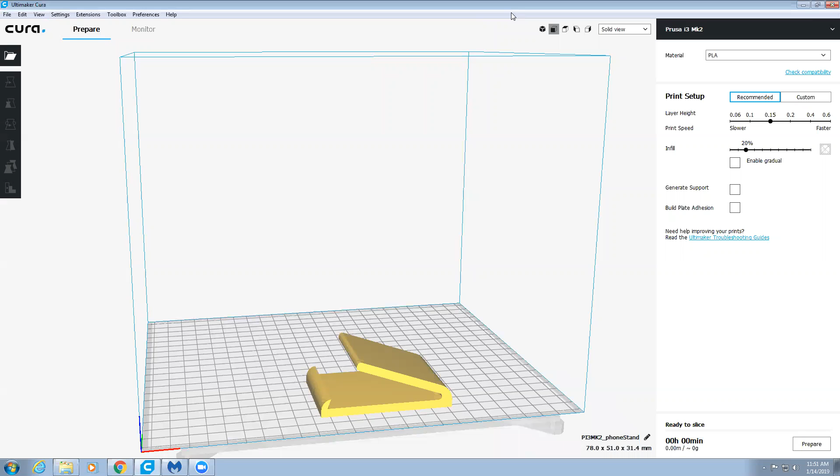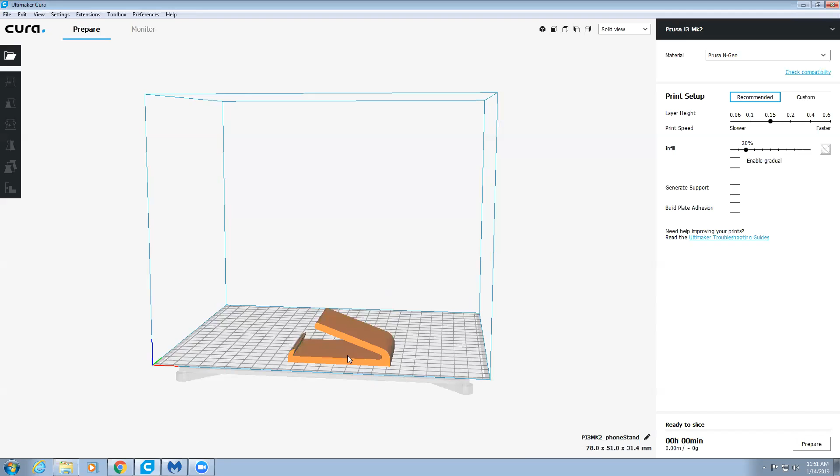After you've selected that, you'll notice the build plate changed to match the size of the Prusa. Now we need to make sure we're using the correct material that's currently loaded in the printer. Currently we have Prusa's own N-Gen filament loaded, not PLA, so we're going to go to Custom, Custom Material, N-Gen, Prusa N-Gen. Now we have the correct material selected.

Next, we're going to go to the print settings and go to layer height. Layer height is like the resolution of the print you're making. 0.06 is a very fine, smooth surface, but it takes a lot of time to print, almost an entire day for large prints. Whereas 0.6 is much faster, printing within an hour or a half hour, but it's going to be very rough and bumpy, and honestly it might not even print well. I like using 0.15 because it's right in the middle. It takes an hour, maybe 2 or 3 hours to print, but it comes out pretty smooth and nice.

Next is infill. Infill is the amount of material we're putting inside our part. You can do 0% infill, where it's just a shell, or you can do 50 or 100. Notice this box changes to represent how much material we're putting inside our part. You really don't need a lot of material to make a strong part because it's in a checkered box grid, so we're using 20%.

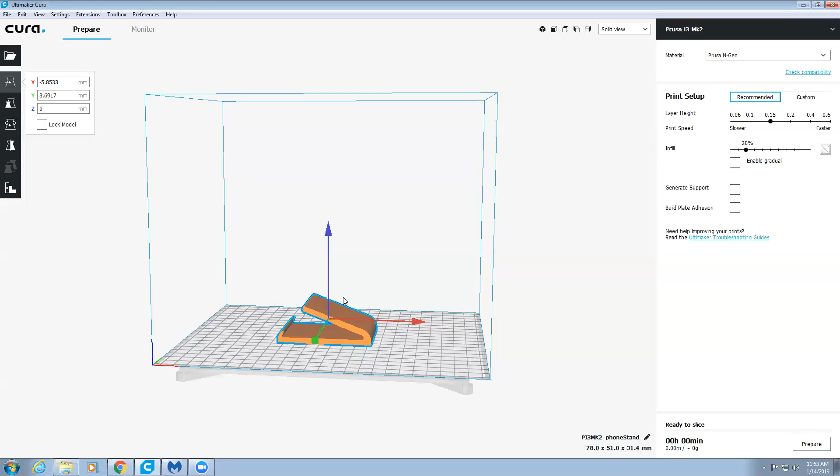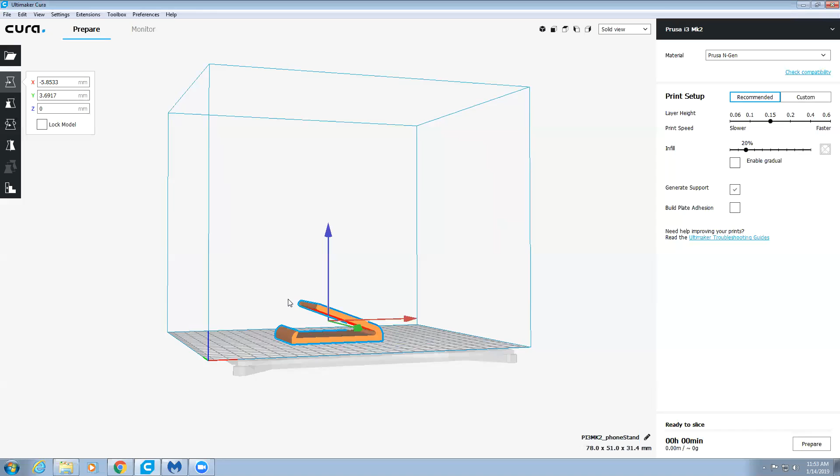Next, you'll go to Generate Supports. Because our material has an overhang, we can do one of two things. We can either select Generate Supports, which will fill this area with removable material you remove after printing to help print the overhanging section. Or, with the material selected, we can come over to the left side, and in this menu we have options to reorient our part to maybe print better and faster.

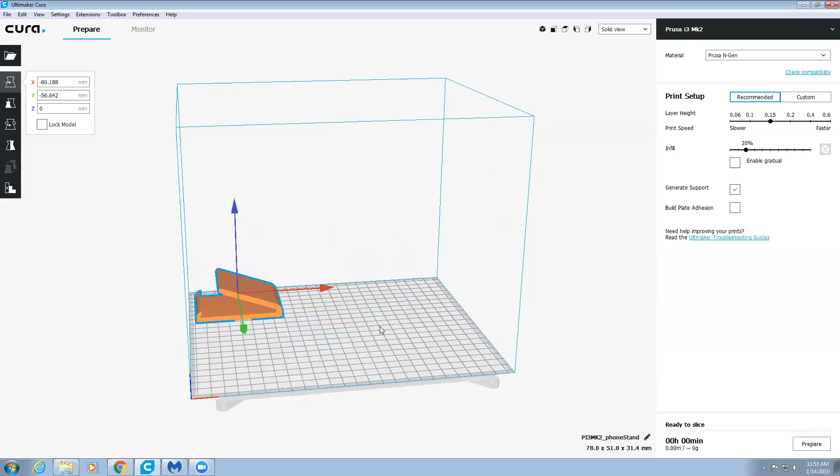So we have Move, which lets you move your part around. I could put it over here in the top of the build plate, and copy my part and put another one over here on the other side to print two. You have Scale, which lets me make it larger or smaller. With Scale, I can do 150% and it makes it a lot bigger, but for this tutorial we're doing 100% scale, so don't really worry about scaling.

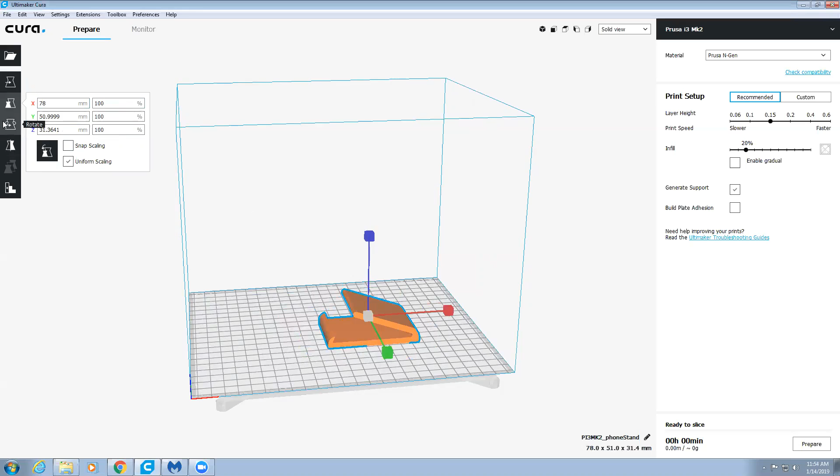Next, you're going to want to rotate it. We're going to select the red line and rotate 90 degrees to the right so that we no longer have a highlighted red section indicating an overhang. That way, this will print faster and use less material.

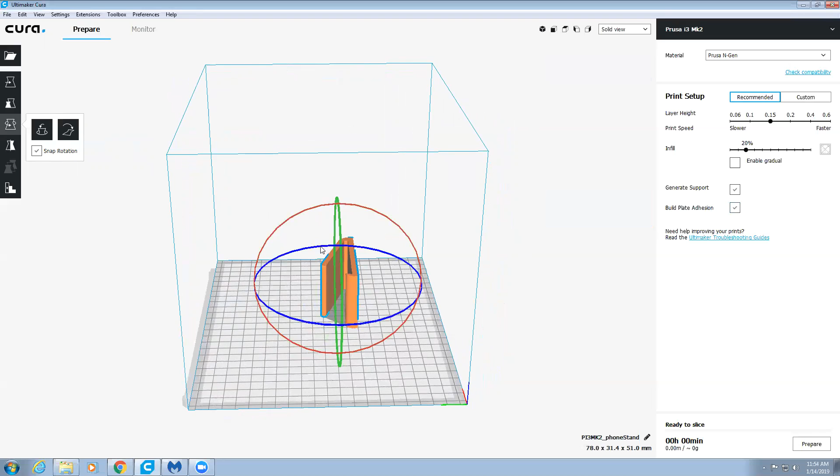Next, you're going to click Build Plate Adhesion. If you don't have build plate adhesion selected, your part has the capability to come dislodged from the bed and move around the build plate, wasting a lot of hours of your time and material. So make sure you have build plate adhesion selected. Since we've oriented our part in this direction, we don't really need Generate Support, so you can deselect it. Once you have all these settings selected and prepped, click Prepare in the bottom right corner, and that will prepare your part and give you a timeline of how long it will take to print. Then we'll move on to the next step.